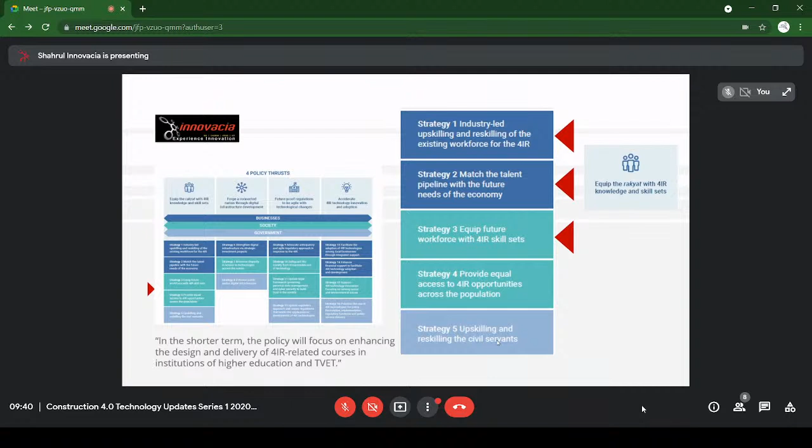I continue with the policy. The five fundamental tech that's being highlighted in this policy: AI, IoT, blockchain, cloud computing, and advanced materials and technologies.

There are 10 sectors in focus in terms of implementation, with 6 supporting sectors. Of course, if talking about modern construction, manufacturing is a key element, especially when we're talking about IBS or prefab construction. Transportation is also related well with the construction industry itself. And if talking about TVET, education is being highlighted in the policy as one of the sectors supporting the socio-economic needs. Also highlighted here is professional and scientific technical services.

This is also crucial because at this moment we know that the response from students towards entering STEM and TVET related courses is currently quite low and dropping each year. So this is also one of our contributions to the industry. We would like to share more about construction.

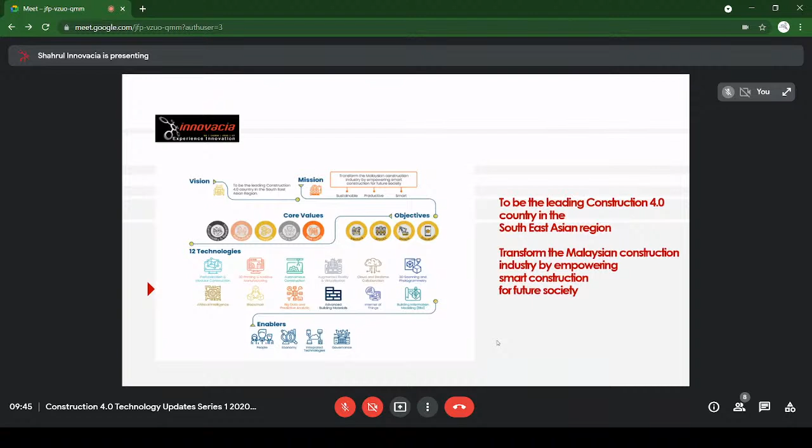With that, 12 technologies have been identified, 6 of them for the short term. Number 1 will be prefab, which is IBS. Number 2 will be building information modeling, BIM. Number 3 will be autonomous construction. Number 4 will be AR and VR. Number 5 will be cloud and real-time collaboration. And number 6, 3D scanning and photogrammetry.

As we can see from the players already in the market, these six technologies are actually the most common in the market, and we can say that they are the most ready solutions supporting the industry. So the idea is for the industry to follow through, for more players to come in, and for more players to utilize these 6 tech for the benefit of the construction industry.

For the medium term, which is 1 to 3 years, the aim is to focus on big data and predictive analytics, and of course T.S. Sharul will share on machine learning later today.

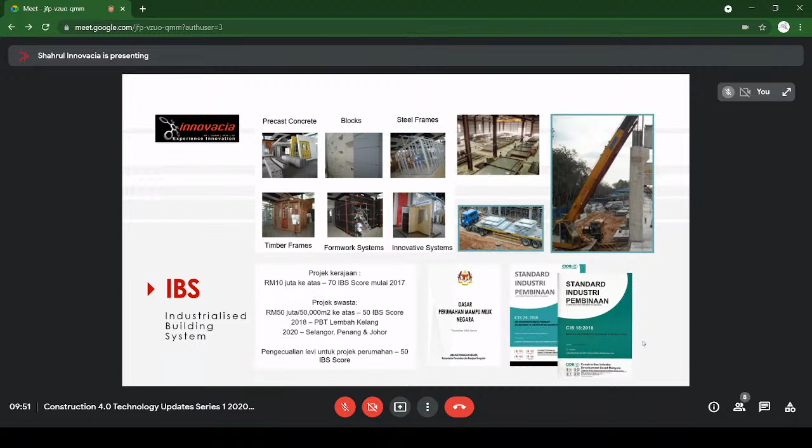And as mentioned, IBS is already in the government policy through the circular by Treasury, and also recently, about 3 years back, it is also embedded inside the Dasar Perumahan Mampu Milik Negara. In terms of design, it is mentioned that the design of all affordable houses in Malaysia needs to use IBS and BIM. And following through, BIM, or Building Information Modeling, is also important.

The process of BIM - of course, we are talking about BIM, you're talking about software, but you need to know about the process of BIM. I'm glad to know that BIM is already one of the subjects being offered at polytechnics, but I really wish that IBS and BIM subjects were embedded inside the compulsory topics of the syllabus rather than as additional or add-on topics. I would prefer, I would suggest, that IBS and BIM be embedded inside the main syllabus itself.

Okay, again, back on BIM itself - beginning RMK 12, all JKR projects will require contractors and consultants with BIM knowledge. You need to submit proof of your BIM knowledge, your certs, examples of your BIM models, your list of software and hardware, and your manpower. So beginning RMK 12, all government projects will be focusing on BIM.

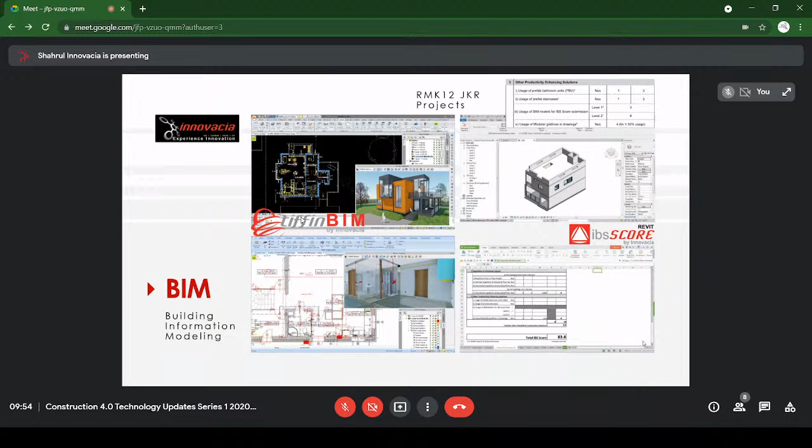And I'm glad to share that we already released our BIM-based IBS score calculation, called IBS Score for Revit. This is our first edition. Even though we have our own BIM software called TiffinBIM, amended with the Malaysian standards MS 2522 and MS 1064, for the first edition of the BIM based IBS score software we released it for Revit because, as we know, the main users of Revit are PWD or JKR. So for the first issue we are releasing it for Revit, and of course we will be releasing it for TiffinBIM and other brands later.

Next will be the other construction tech, for example autonomous construction including autonomous vehicles, 3D scanning, cloud collaboration, AR and VR, big data, IoT, blockchain, artificial intelligence, additive manufacturing, and advanced material. So these are the other 10 items, or 10 emerging tech, that are being mentioned or focused on in the Construction 4.0 strategic plan 2021-2025.

So for both students and academicians at the TVET level, it is best for you to focus on these items, either through the enrichment of the syllabus itself, or the opportunity for students to do internships, or even for your internal R&D. So the focus is on these 12 emerging tech.

So I think that's the introduction that I've just presented to you. And of course, for the next session, I'll be inviting Engineer Ng, the Director of IBS Technology Solutions, to share more about automated precast manufacturing, to be followed by TS Sharul Fitri on machine learning tools.

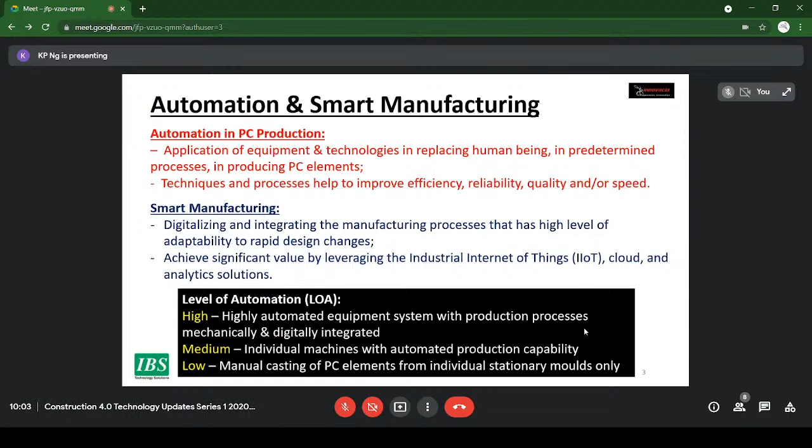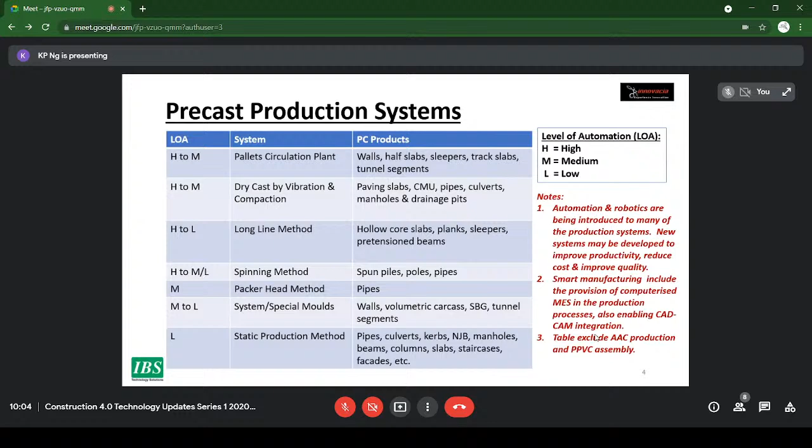First is the so-called pallet circulation plant, or carousel system. This is the one capable of giving the highest level of automation, because instead of the mold staying stationary, the molds are made to move. The molds are in the form of pallets—big steel pallets, flat pallets.

You may have maybe 40 of them in the whole factory, and they circulate around to each production station. First, a station for plotting, putting in side forms, and putting in the casting items and steel bars. Then you move to a casting station where concrete is poured in, then to the finishing site with the smoothing device, then into a curing chamber to cure the elements. After curing, it goes to the demolding station where the panels are lifted up into the stockyard, and the empty pallet is cleaned and recycled back to the beginning.

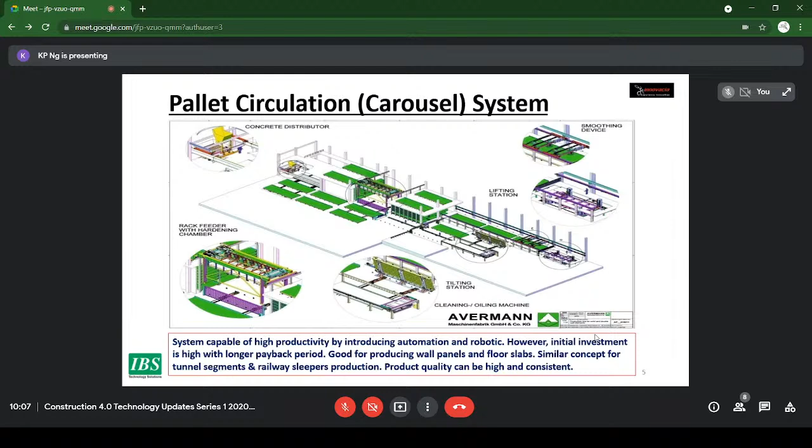Some of the workstations in the carousel system: first we have production control, the computers. The computers and servers need not necessarily be in the factory itself—they can be in the cloud. The computer and server integrate the whole factory system and instruct the machines and robots to operate. Input data comes in through the BIM and is converted to a language readable by the computer, which instructs the whole factory to operate according to what you want.

The next station is the cleaning station that cleans the pallets and sprays in more oil. The marking station has a plotter—if you draw the drawing, this plotter will plot out, say, a wall panel in full scale onto the steel pallets, the steel plates. Then it moves to the next station, where the shuttering robot comes in and picks the magnetic side forms to put at the sides of the panel.

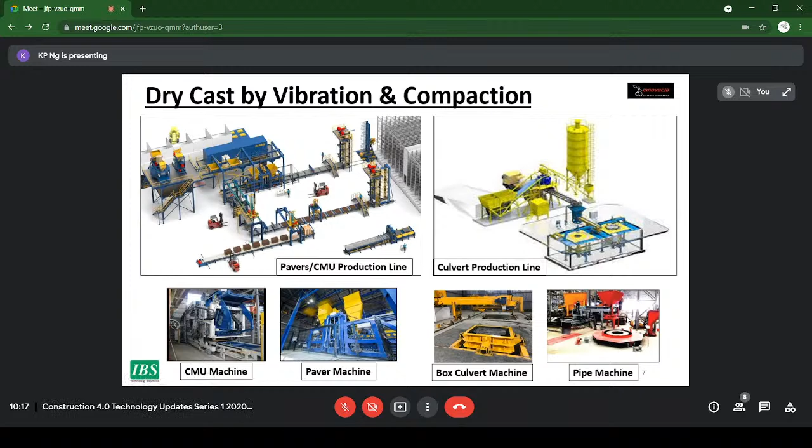Another system of producing precast concrete is the so-called long line prestressing system. By the name, it is very long. For example, in the case of hollow core slab production, the length of the bed is 120 meters, or sometimes as long as 150 meters.

Why do we need it so long? Hollow core slabs, like planks, can be produced by this bed, and they are pre-tensioned with prestressing strand. So there are two advantages of having a very long bed.

First, the prestressing force is measured by elongation of the strand or the wire. If we measure the elongation over a long distance, 120 meters or 150 meters, the measurement will be more accurate because the elongation will be more. Compared to over a very short distance, say 10 meters, the elongation won't be as much, so the accuracy is not there. So the long line will give you better accuracy.

On top of that, the front end and back end of the strand that get cut away will be wasted. Over a long line, the wastage at the two ends will be smaller relative to the distance. If it is a short distance, a little bit of wastage before and a little bit after will add up to a lot. The wastage percentage will be high, I mean the wastage of the strand or prestressing wire.

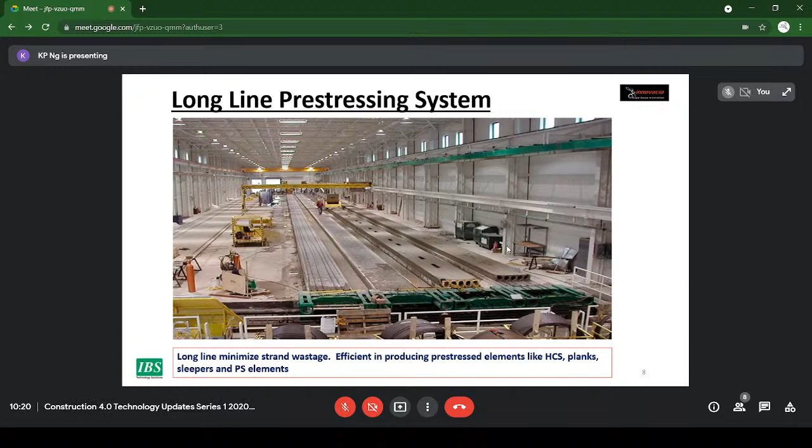In addition to the carousel system I mentioned earlier, there are two ways to produce railway sleepers. Next is the spinning method. Actually, the spinning method technology is not new. As far as I know, spinning machines were already around in the 70s. The concept is very simple.

You have rollers driven by electric motors at high speed. If you have a mold that rests on the rollers, it will make the mold rotate at very high speed. So if you introduce concrete into the inside of the mold, this concrete will be thrown out by centrifugal force and will stick near the inner surface of the mold, becoming very hard at high speed.

This system is very good for producing spun piles, for example pre-stressed spun piles, and can also be used to produce pipe culverts. In producing pipe culverts, you can actually produce two pipes at one go, a double pipe kind of machine with three sets of rollers. But the production of pipes is quite slow, one pipe may take 20 to 25 minutes to produce. It takes time to spin.

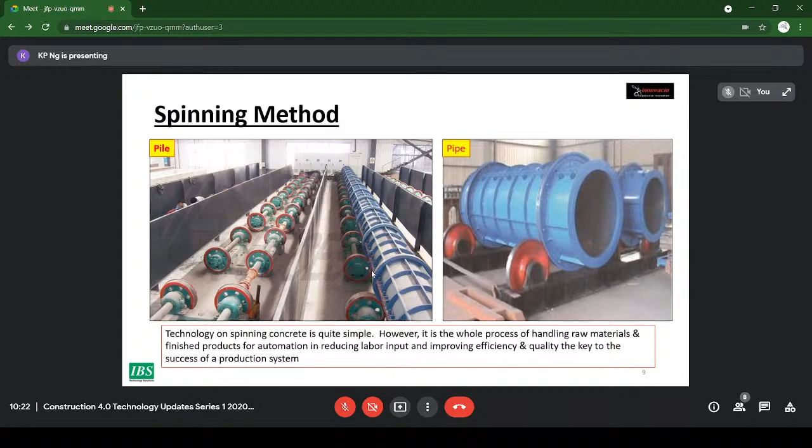So this is the spinning method. The next system is the packer head method, which is very useful for producing smaller diameter precast concrete pipes. They are produced vertically using quite dry concrete, discharged from the top of the pipe. Inside the pipe there is a packer head that rotates, pushing the concrete outward to stick to the inner surface of the mold, at quite a high speed.

So as you discharge concrete into the pipe, the packer head pushes and moves up, and the whole pipe is done very fast. Each pipe can take maybe 2-3 minutes, and all you need is 2 sets of molds.

Like in this case, 2 sets of molds. One set that's filled up already, the forklift will transfer it out to the curing area and open up the mold. It's demolded almost immediately, leaving the pipe there, and the mold is closed back, the rebar cage put in, and brought back to the casting station again.

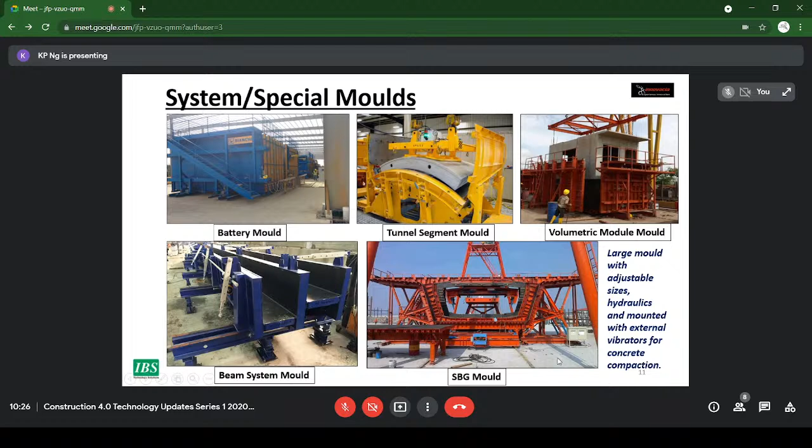Static production system is the most primitive kind of production system, whereby a mold just sits at a particular place, and all the raw material and the workers will be there to produce the element. After production, it's discharged, the element is moved out, and then the mold is closed and produced again.

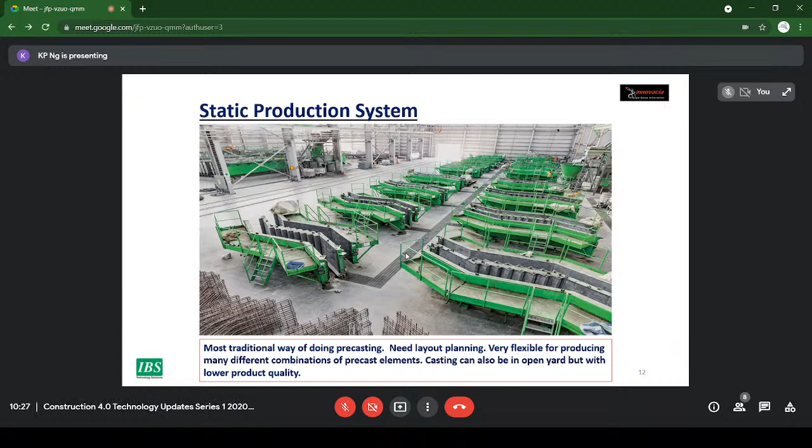Okay, we'll touch a little bit on the batching plant. Modern day batching plants have gone very, very automated, and we don't even need to see the conveyor belts and all those. There's no payloader.

Everything, in fact, the raw material, when the lorry comes in, will be tipped underground, and then brought up by a bucket elevator to store in silos. Even raw material will be stored in the silos. Production will be controlled by a computerized system, which can be linked even to the suppliers, so the suppliers can troubleshoot the production system.

And this is a concrete mixer and delivery of concrete by a so-called flying bucket, and casting by casting chute. In addition to that, a concrete batching plant can also incorporate a lot of other things.

You have the admixture dosing, moisture sensors to sense the moisture content of the aggregate, and different silos for GGBS, microsilicas, and PFA, even fiber dosing for fiber concrete. And you can even put in a chiller or ice flake machine to bring down the temperature of fresh concrete.

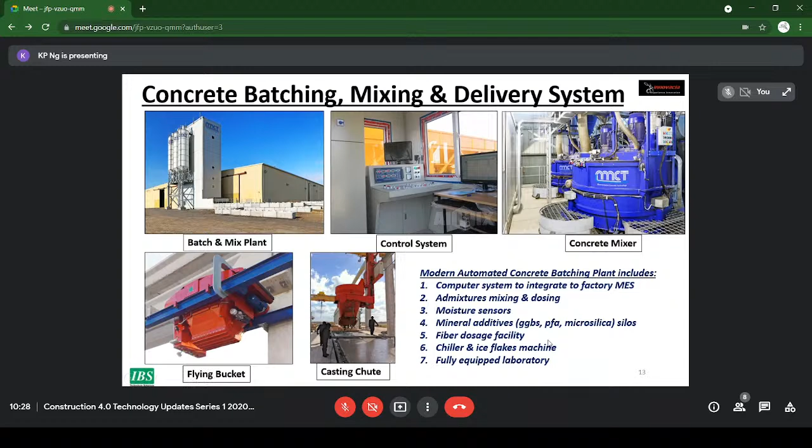So of course, other than that, you have a fully equipped lab. So in managing production operations, assuming you are a factory manager, these are the responsibilities.

Being a production manager, you have to ensure that the facilities are well maintained, the processes are correct, and the raw materials and hand tools are there. You make sure that the workers are there, how many hours to work, and how is the productivity, how's your cost, what is the break-even volume, and we make sure we maintain that.

Other than that, of course, we talk about quality management, ISO 9001. We will also have to be concerned about safety and health and the environment.

Nowadays, with COVID-19, we have to take care of the health aspect, the SOPs, and then some regulatory compliance to the SOP to meet the authorities' requirement. So these are the responsibilities of a production manager.

So in production planning, in a factory, the production system is very important. The planning is very important in the factory.

First, from sales projection, the confirmed job or about to confirm job, and based on the schedule and offtake, we can come up with the loading to the factory, and then we plan out how much to produce based on the loading. And we have to make sure that we have enough resources like raw material, manpower, equipment, and make sure after production, there's enough space in the stockyard to keep it.

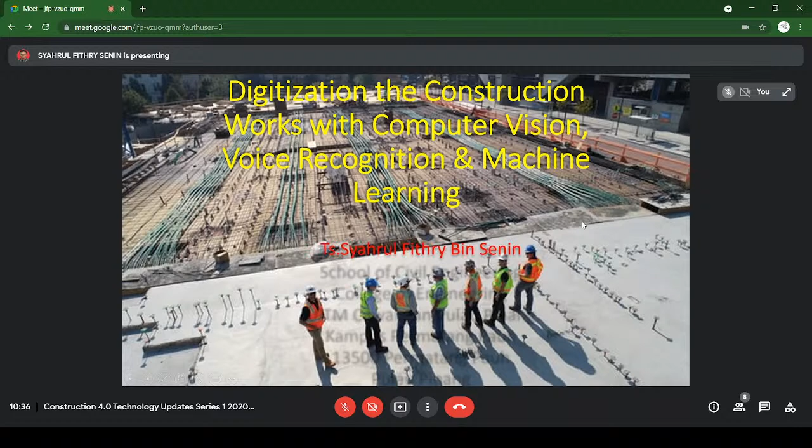My name is Ts. Syahrul from UiTM Penang. Today I will talk about machine learning, especially in construction projects. I will share my slides. I will narrow down my topics to construction works, where we can digitize our construction works, especially in operations at sites, by using IoT things, computer vision, voice recognition, and machine learning to give benefit to the construction industry. My name is Ts. Syahrul Fithry from the School of Civil Engineering, College of Engineering in UiTM Penang, campus Permatang Pauh.

Some of it is listed on the left side here. You need to know the progress of the project, how the work is progressing, is it according to schedule, is the progress okay or not, how is the performance of the work, is it bad, progressing, or pending, and how about safety and compliance to certain regulations needed on site for your company. You need this data instantly in order to make decisions.

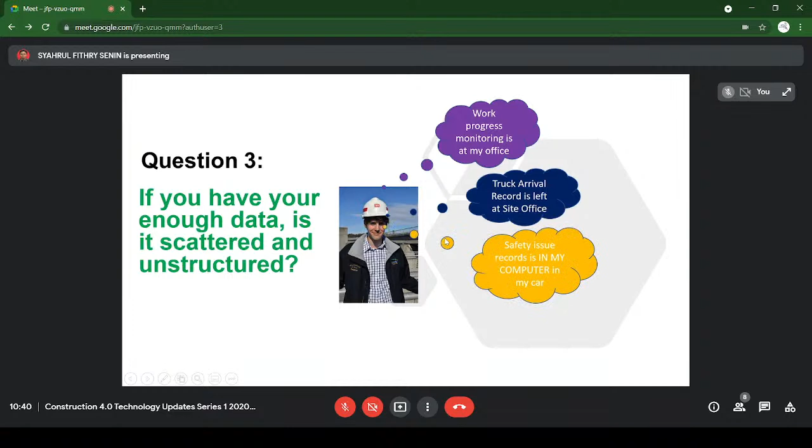It's not structured, it's not manageable. So maybe the progress report is at her office, the truck arrival record is left at the site office, and maybe due to COVID-19 she cannot come to work. Maybe she's not healthy, or not permitted to go to work according to the schedules, and so on. Other reasons: maybe the safety issue records are in the computer in his car. So all of this data is scattered and unstructured. And the bad thing is, I forgot where I put my data. This is a very bad thing.

So in order to answer these three questions, especially in this event, we need a kind of automation. That automation we call machine learning and also IoT. So that will be a new thing for us. That's why my presentation is more on awareness rather than implementation, because from my observation, we have a very low implementation of using

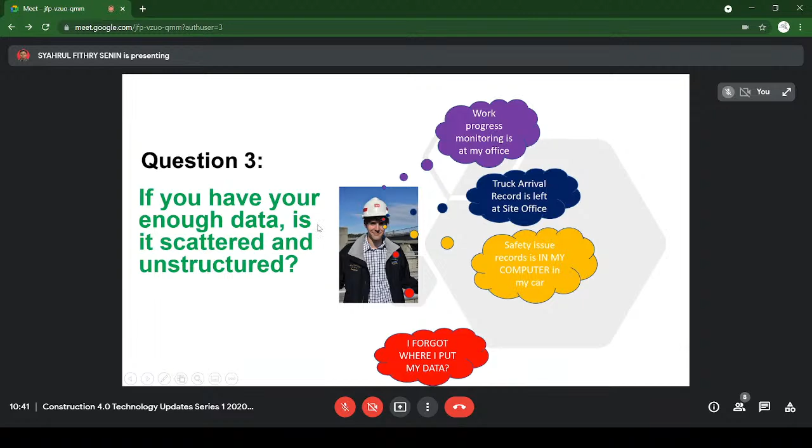machine learning and IoT on our construction sites. Okay, so this is data taken from Europe, from a company, FMI. They found that of all the captured data, 96% of the data captured by industry is not used. It's just not used in the industry. They just get the data. Maybe 4% will be used in the industry and 96% is not used. So it's a waste of time. You waste a lot of money, you waste a lot of time to gather data, but only a few of them are usable in the industry.

And 90% of the data is also unstructured. Only 10% - some companies have very well-organized record management, but most of them are not using a systematic approach to structure the data. And 30% of the construction team's working hours are spent looking for project data. So you have to engage a management person or your crew or your management team to do this work, but only 30% of the working time is spent on this project data.

So why not solve this problem by using automation? You know data is very important today, because if you don't have good data, your company will not survive, especially in this event today where we have the COVID-19 pandemic and so on. We need this data because you have to turn that knowledge, your data, into action at your site.

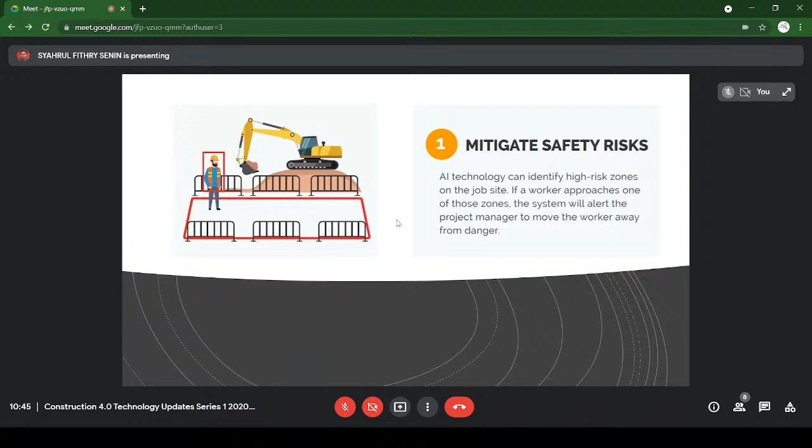Okay, so what are the advantages of artificial intelligence? You can use artificial intelligence to mitigate safety risks. Especially if you have work using a lot of equipment that may impose danger to the person using it, you can detect the object and track the movement of that object. Especially if you see this picture, you can monitor this excavator that is trying to scrape the soil, and the technology can detect the movement and track where the equipment puts the soil - is it in the dangerous area or not? And if the system detects some dangerous action, it can give an alert to the required project manager, either remote or on site, so that they can take some action to get outside the danger.

The second advantage is to avoid compliance violations. This technology, artificial intelligence, uses certain sensors such as camera video that will be installed at certain places on your site, so that it can give you monitoring on any movement, object, or event done on your work site, and give you an alert on what violation has been done by your workers or equipment. This is also very important to avoid potential penalties and injuries, so that you can reduce the cost of solving this problem.

The third one is to manage suppliers. Your site will have a lot of material handling, with material coming in by lorries or vehicles going in and out. You can monitor the time of arrival of the trucks, the plate number, what material has been brought to the site, and who is the driver. This is done by camera, so you don't need a human being to monitor this. This is very useful especially under the new SOP where you have to limit the number of staff at site. By using this system, you can detect the schedule of your truck so you have records and evidence.

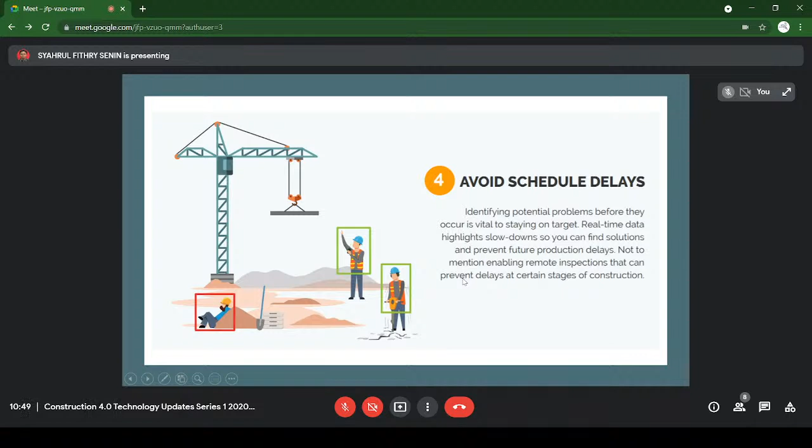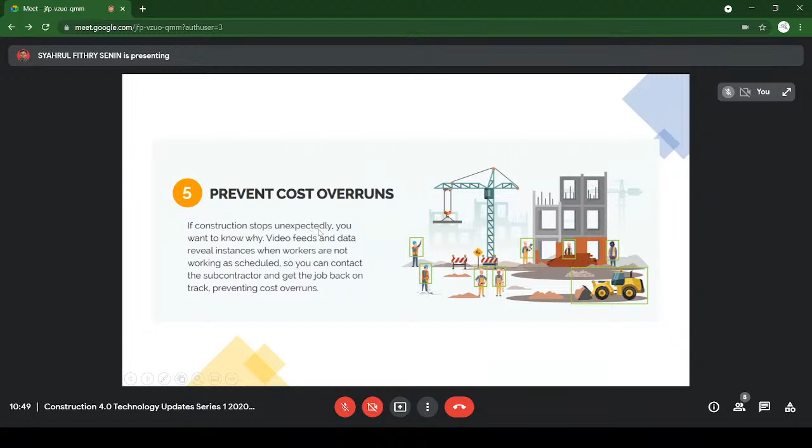The fifth point is preventing cost overruns. Because we can remotely monitor a lot of things on site with this technology, we can prevent many costs that would otherwise be incurred. This is very important especially when there are disputes between parties on site. By giving videos and facts and figures to the people querying the work, managers can give clear proof to the subcontractor or main contractor, and they can see the facts in front of them. This gives your work credibility because you can make a very true decision on disagreements.

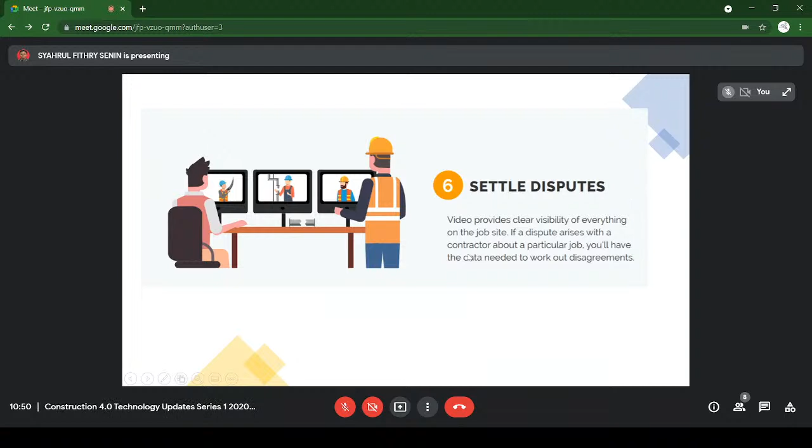And the last one is improving security. Most sites already have security features installed, especially cameras, but this system can also detect the movement of objects - perhaps due to burglary or similar. It can also detect if material has been reduced from a certain amount because someone has moved it. So you can capture a lot of data just using cameras and artificial intelligence technology.

So this is the requirement, the harapan, from the CIDB, where they want this in the future - from 2021 to 2025 master plan. This is maybe what we can do on our sites, where we can install machine learning equipment plus IoT on our construction sites.

So we can have smart construction sites where you install simple tools such as cameras that can record live video so you can detect the movement of objects. We also need to install fast internet facilities and infrastructure, and other simple sensors such as images you can put on the helmet of your staff, so the camera can recognize whether they are staff at the site or not. This way, they can classify people coming to the site versus guests. This is important because it gives data collection methodology to users, so decision makers can get the data instantly in a structured way.

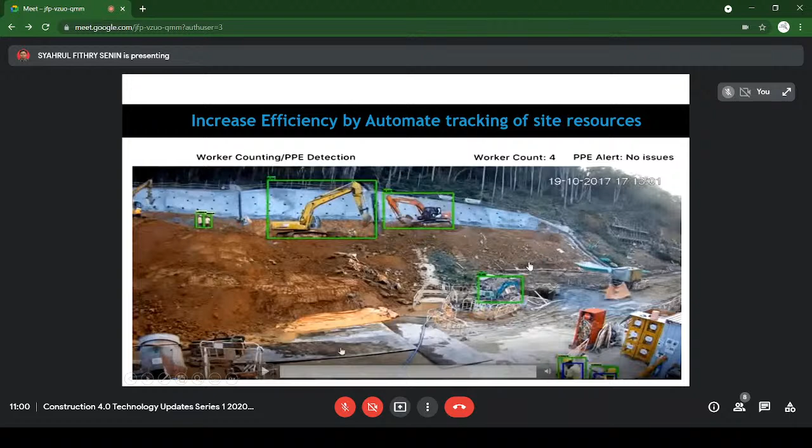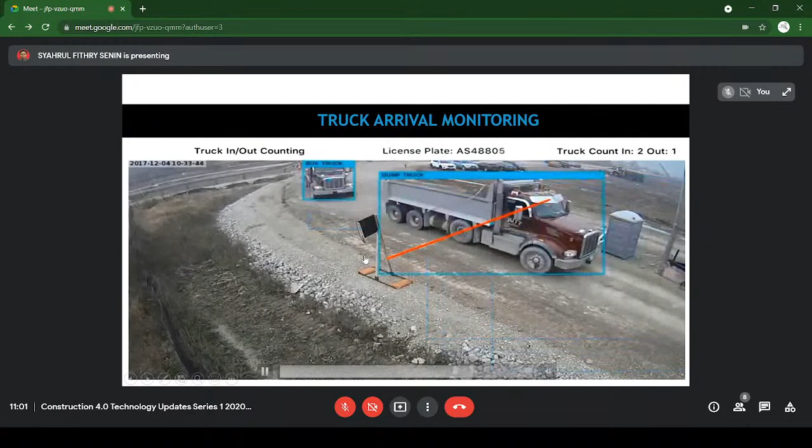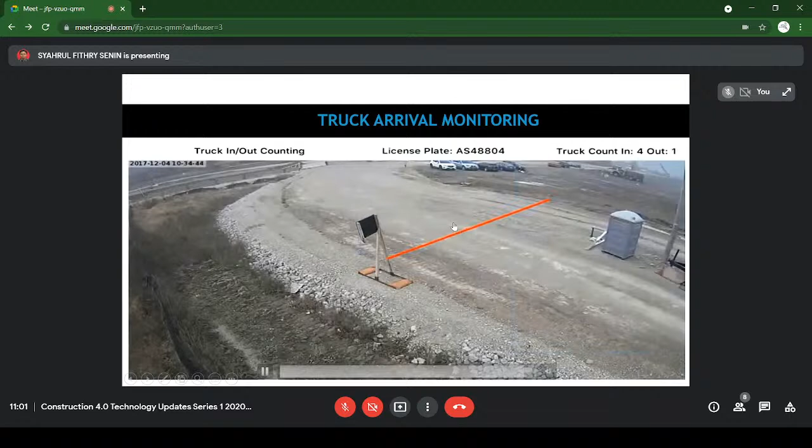This is a very smart, good decision when you want to monitor whether the supplier is doing their work for your site. You can call them to ask why a truck has not yet arrived, because you have good evidence to show your supplier they are not coming yet, maybe they are delayed. You can see the time and date are recorded.

From the software, you can also analyze the vehicle type, the time, the license plate, how many total loads, and the average load per hour. A lot of calculations can be done and predicted by the system. This is a very good overview for contractors who want to see the progress of the work on site.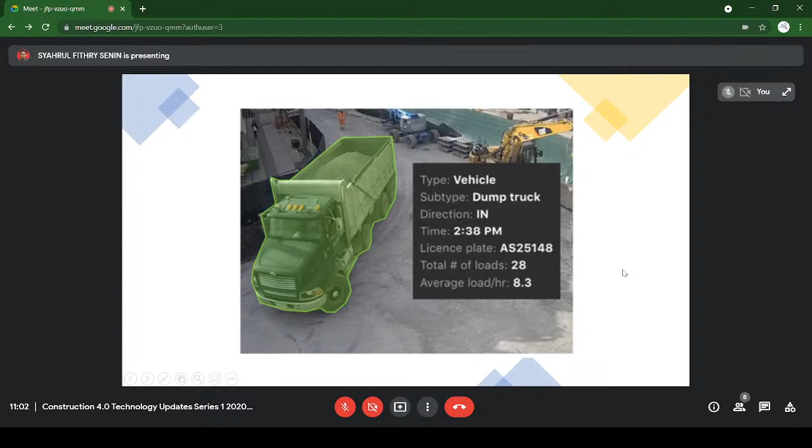This is a very good feature where you can monitor site progress. Before I run the video, you can see that some of the floor is marked in orange color, showing where the steel bar installation is done. The other part not in orange means the rebar is not yet installed.

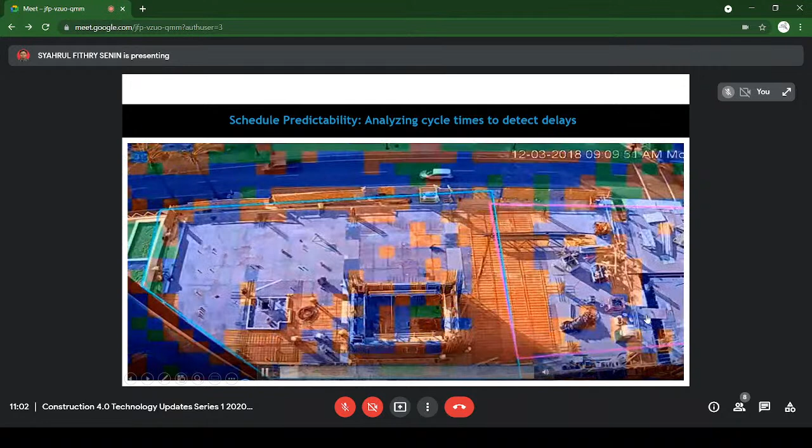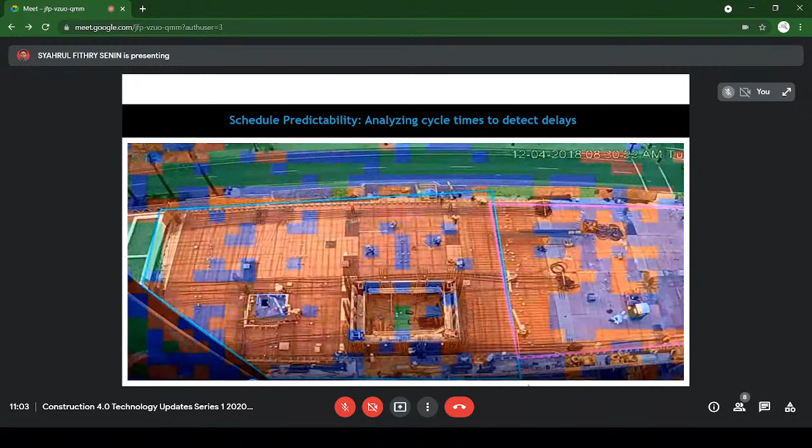So if I play the video, you may see the progress of the work done. It can track and classify the slab to show how well the progress has been done, using certain colors. You can ask the programmer to use this technology, and then this data can be stored in cloud storage. You can see that a lot of the places have now been installed with steel bar and so on.

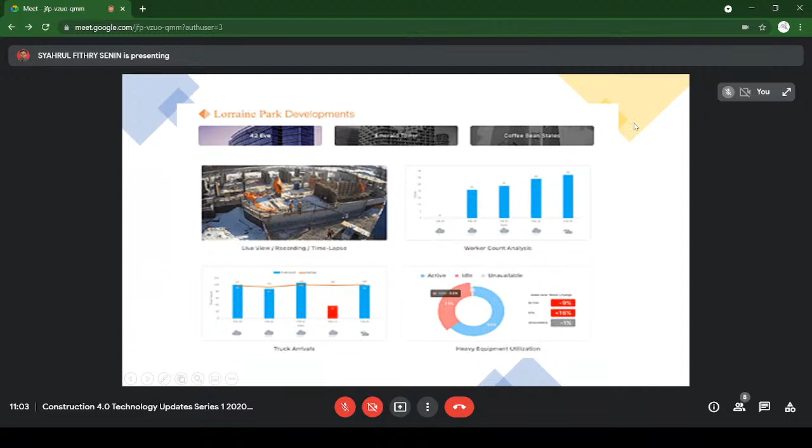So this is the analysis of the result that you can get from the video. You can view the histogram of the equipment, the progress on site, truck arrivals, and so on. This is a very good overview of the work that has been done over certain durations, and you have to monitor this because of the schedule, because time is money in construction.

This is one application of machine learning where you can track the workers' trades inside and outside, and recognize whether they are using a helmet or not. Some of the helmets have been installed with certain images so that the camera can recognize the image and categorize it according to the trades that have been registered.

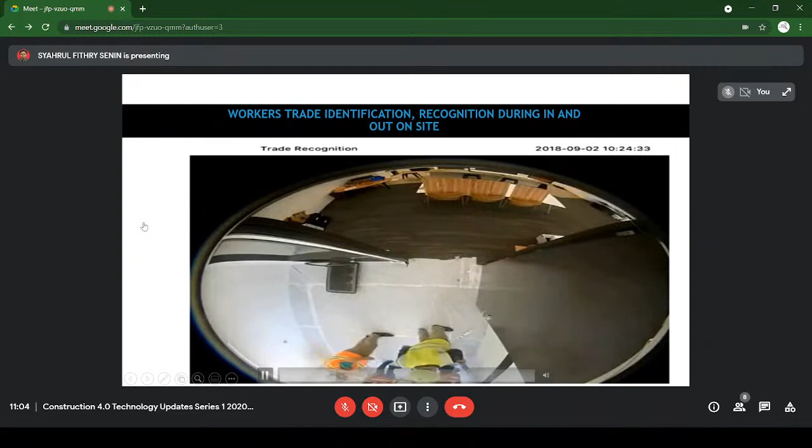So if I play the video, you can see the trade recognition here. Once the person enters this gate, the trade will be recognized. According to the camera resolution, it can categorize the trade of the workers and so on. The time and date of that person entering or leaving the office is recorded.

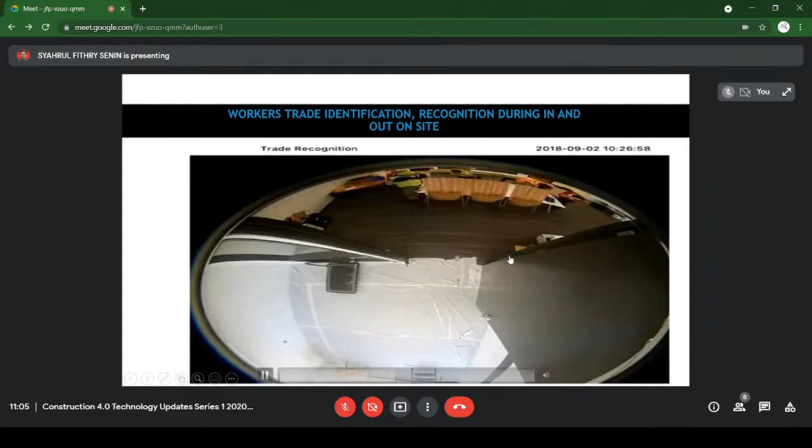So there's no need to use a handprint scan or anything else, because the data is stored only on that device and is not accessible otherwise. You can get the data instantly by having it uploaded to the cloud.

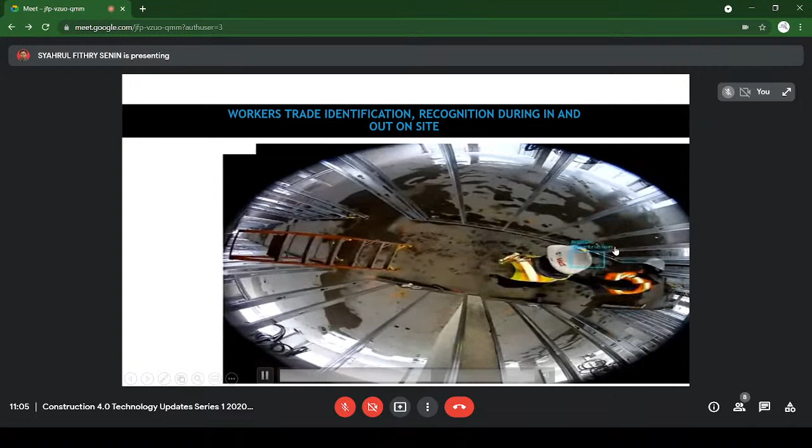So you can see the person identified as an electrician there. The trade is shown because there is an image detected by the camera. So you can view, as a contractor, whether your workers are doing their work or not at every floor.

So maybe if you have 20 stories, you'd have 20 cameras installed, and you can view your workers while having coffee at home, having breakfast with your family, and do your work remotely in certain ways.

Because sometimes you still have to come to the site, but at least this supports the government regulation to reduce the number of workers at site.

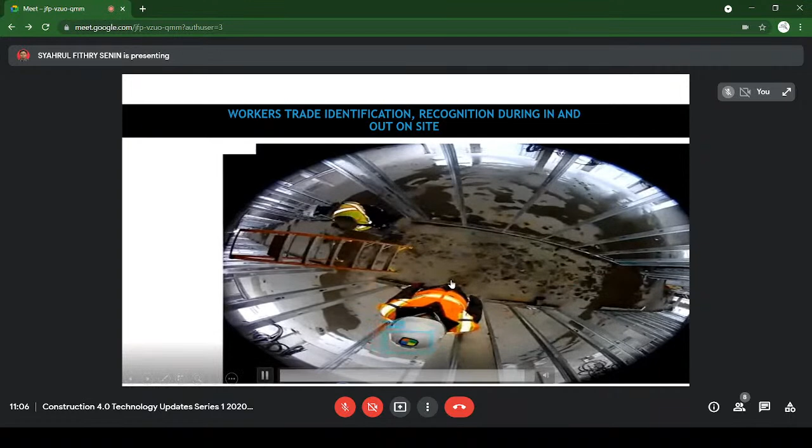This is another good view where you can monitor physical distancing SOP for COVID-19, the distance between workers at site, by using the camera.

So if I click this, you can see that the camera can label the distance between the workers, whether they are complying or not, and this data will be uploaded to the cloud.

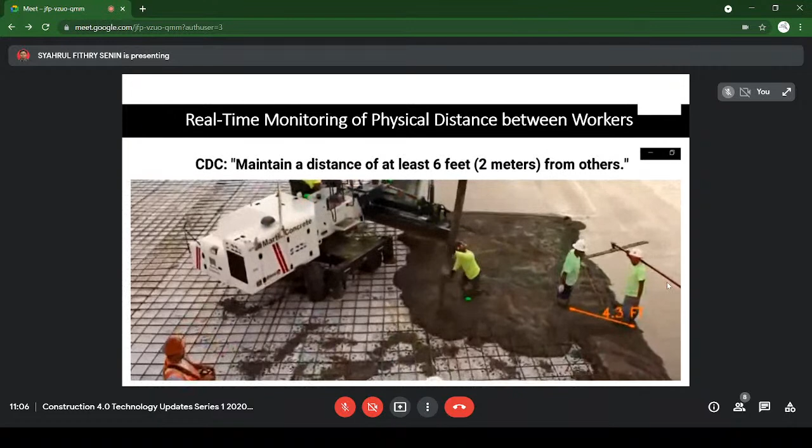As a manager, you can see how well your site workers are complying with the physical distancing set by the government. This is 2 meters in Europe, and in our country, I think it's 1 meter.

So you can see from the camera itself the workers not following social distancing, and mark them with red color. You can see statistics at that time on how many workers are not following social distance. These three fellas are not following social distance because they are too close here.

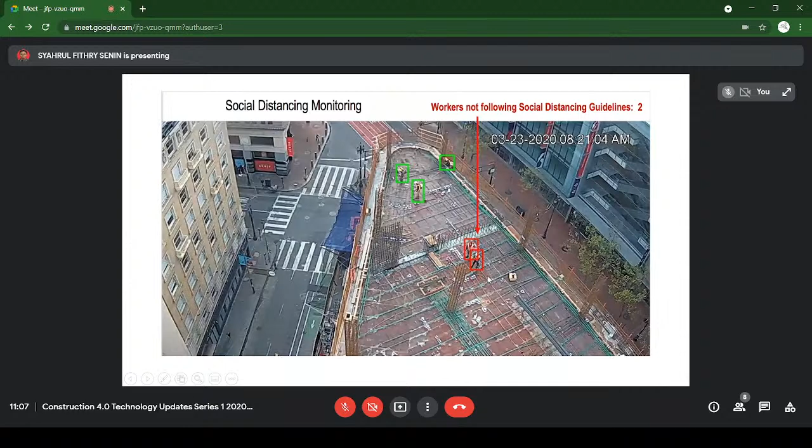So you can ask your supervisors at site to ask them to work following the SOP as required by the government.

This is my last segment where I want to give you an overview of how to use machine learning after construction. The previous slides talked about during construction, but you can also use machine learning to help monitor defects using technology called chatbots.

This chatbot interacts with you by voice, and I'll give you one clip from McTWO. It's about 5 minutes, and hopefully you enjoy viewing it. I will skip this and show it to you.

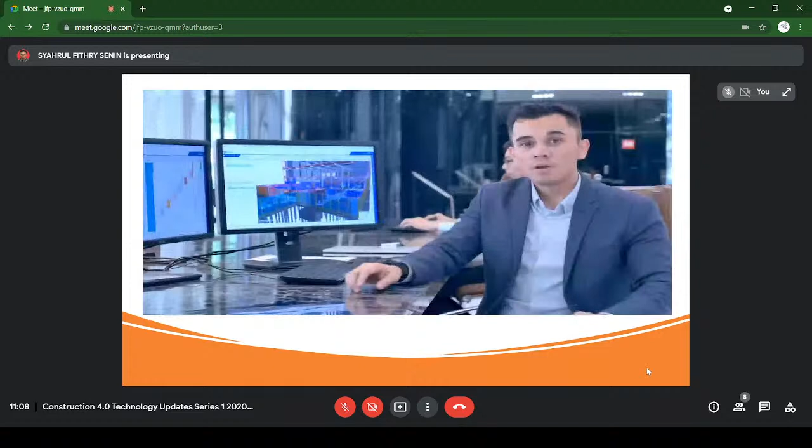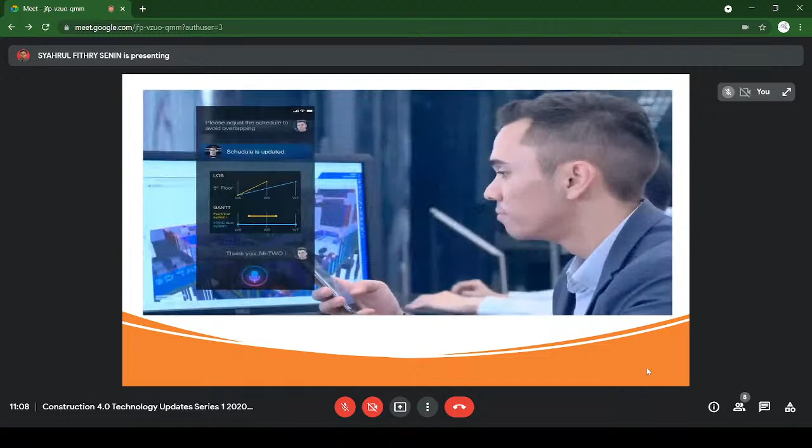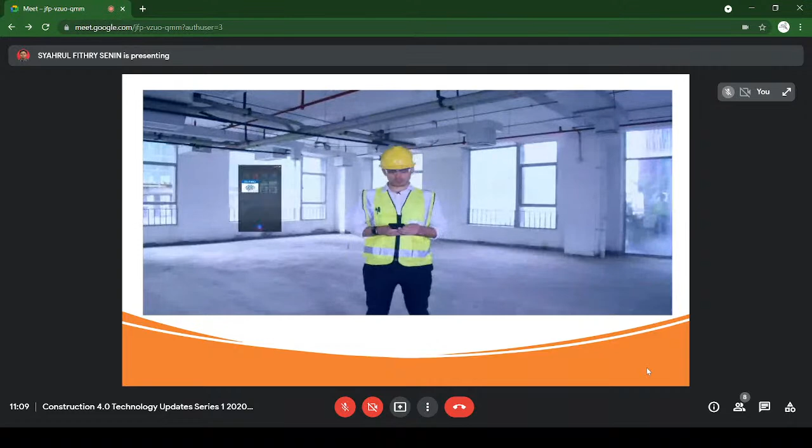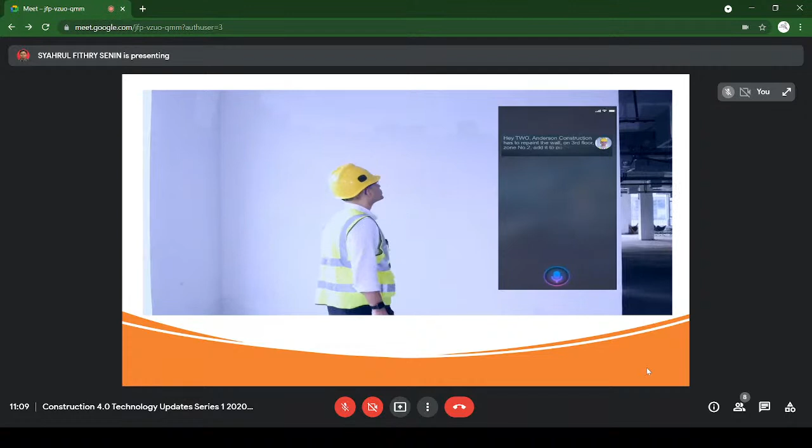McTWO is the world's #1 artificial intelligence empowering the end-to-end process for the building and construction industry. With the voice assistant chatbot, McTWO supports me anytime, anywhere. Hey TWO, are there any activities overlapping with HVAC services in the schedule? Yes, there is an intersection between HVAC duct system and electrical system installation works. Please show me the intersection from the BIM model. Please adjust the schedule to avoid overlapping. Schedule is updated. Thank you, McTWO. We can also ask McTWO via chatbot to match the best building materials from the product catalog. McTWO is not only giving the results, but also provides the analyzed report based on these results with price and quality conditions. With this intelligent outcome, the decision maker can easily decide the best products for the project. McTWO is supporting the safety and quality inspection on site with smart guidance. Hey TWO, I'm on the 3rd floor. Please show me the inspection checkpoint. Hi, Sergey. Please follow the walkway for today's inspection. Hey TWO, Anderson Construction has to repaint the wall on 3rd floor, zone number 2. Add it to punch list with due date next Monday. Issue added. Floor plan highlighted for Anderson Construction.

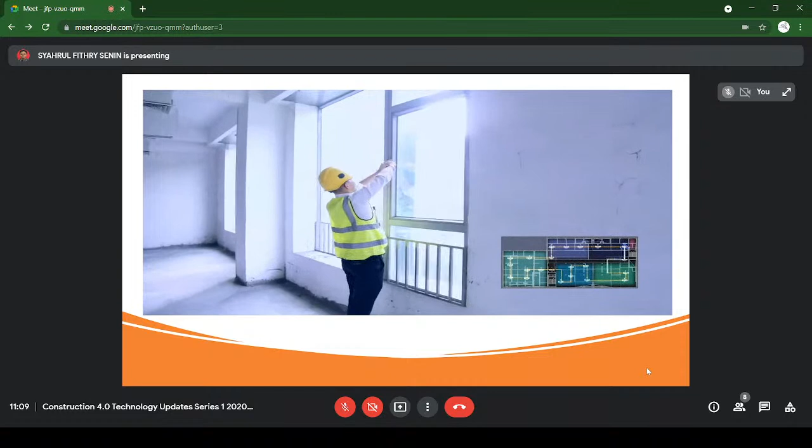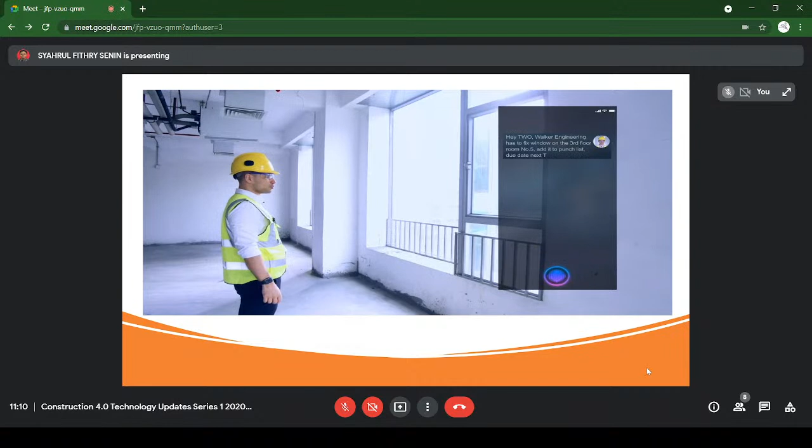Hey TWO, Walker Engineering has to fix a window on the 3rd floor, room number 5. Add it to the punch list, due date next Tuesday. Issue added. Due date confirmed.

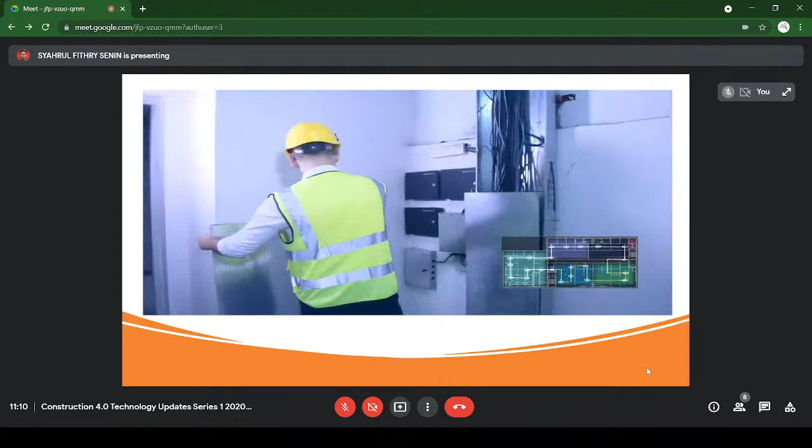Hey TWO, Walker Engineering has to cover the electric duct in the technical room on the 3rd floor. Add it to the punch list with due date next Monday. Done.

Empowered by mixed reality, TWO can integrate the virtual model with the physical site for precise checking.

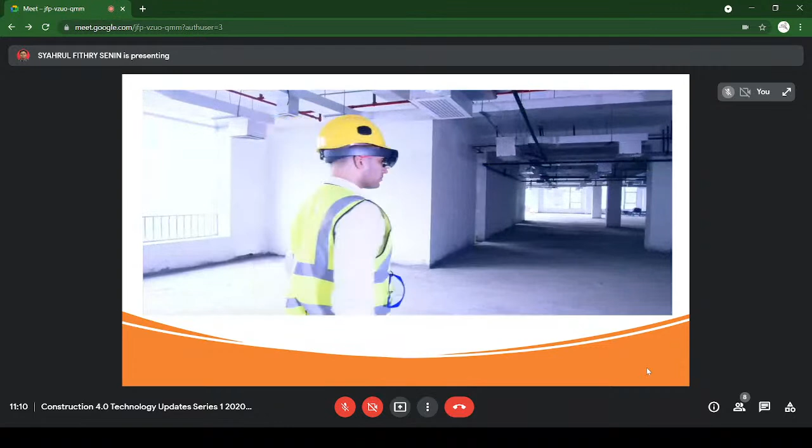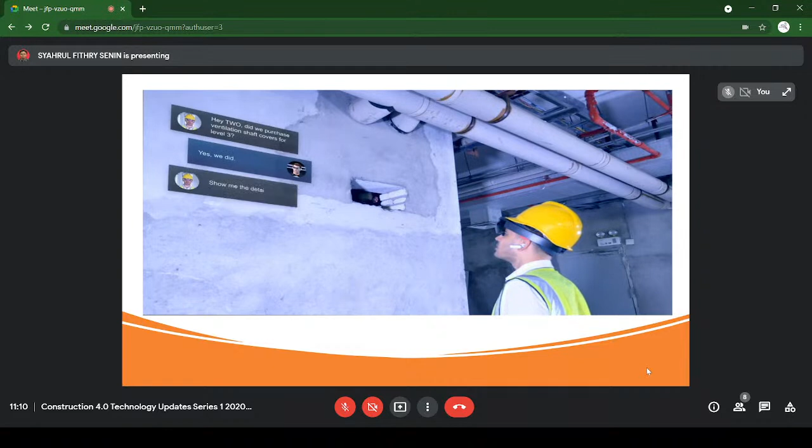Hey TWO, did we purchase ventilation shaft covers for level 3? Yes, we did. Show me the details. Please see on screen. Okay, let's take a measurement.

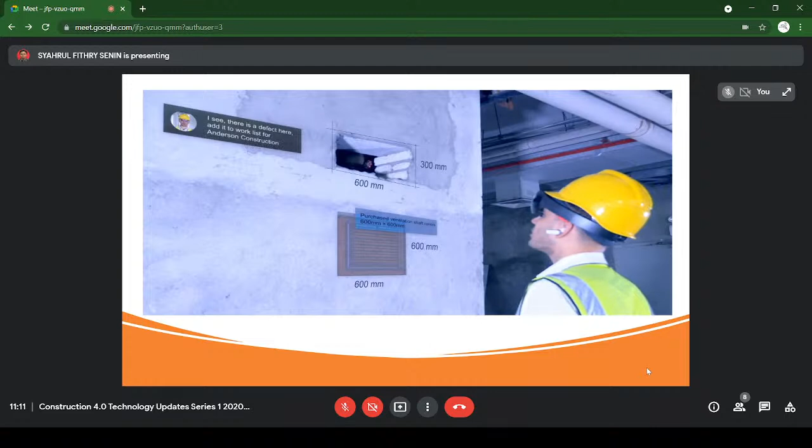I see, there is a defect here. Add it to the work list for Anderson Construction. Defect added. Thank you, TWO.

Hey TWO, can you call Tony? Hi Sergey, can I help you? Hi Tony, can you please check the power distribution box for this unit?

Yes, I'm checking from my data. This is the electric diagram. I'm sure this is an incorrect installation.

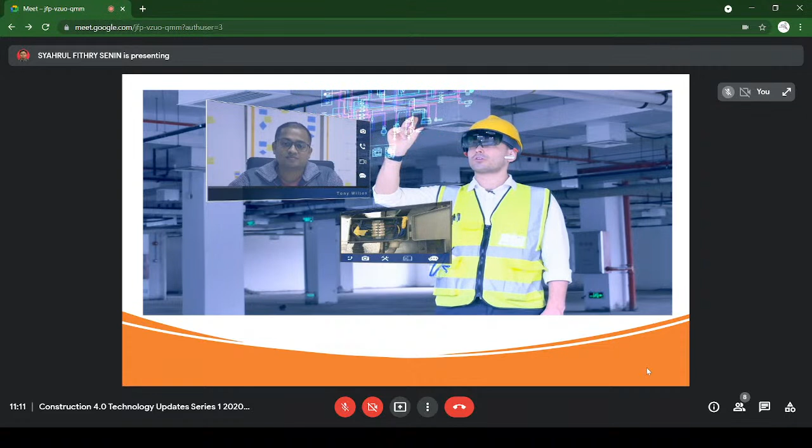Yeah, I also think so. Thank you, okay, see you tomorrow. See you, Sergey.

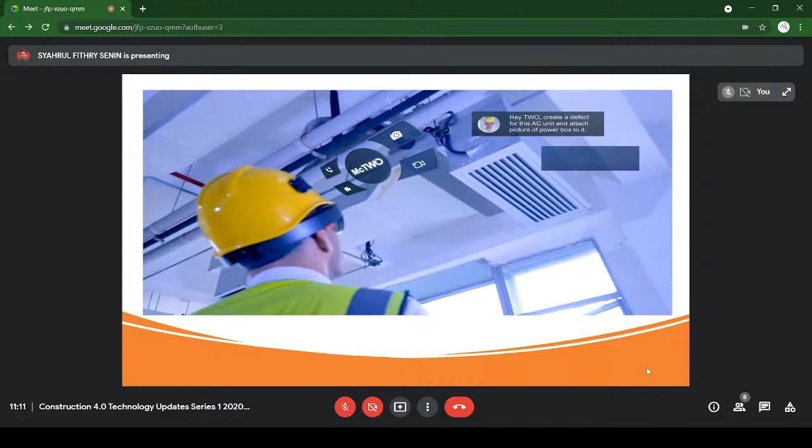Hey McTWO, create a defect for this AC unit and attach a picture of the power box to it. Issue added and assigned to the electric department.

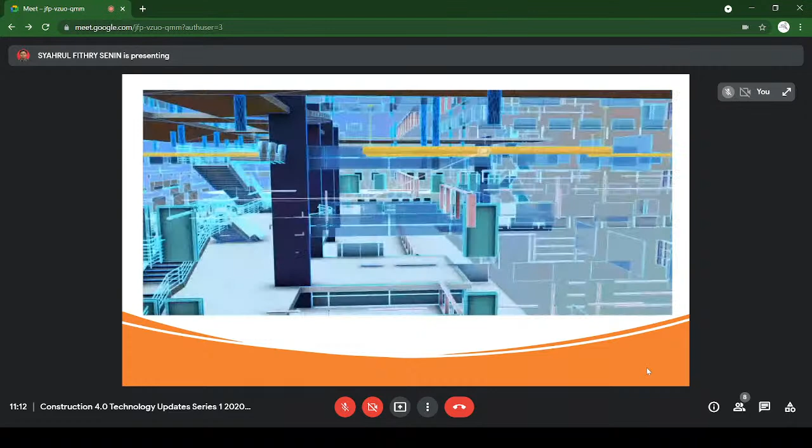Thank you, McTWO. The machine learning and deep learning algorithms enable McTWO to learn from construction big data. Integrated with the artificial neural network architecture, McTWO is capable of providing advanced planning, problem solving, reasoning, and perception for the building and construction industry. Running together, we build the future.

So maybe we can get their experience later on, maybe from this company, through Ir Syahrul, we can ask them to collaborate with us and maybe they can share later on.

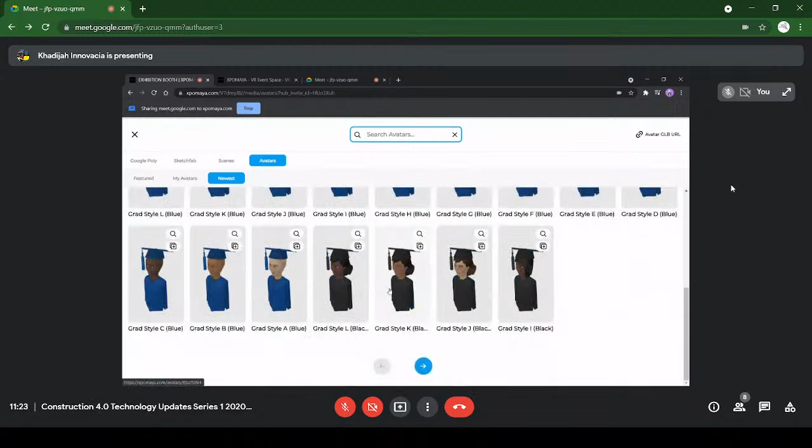Saya akan teruskan di bahagian change avatar. Avatar ni ialah gambar yang kita nampak. Kita boleh tukar avatar yang ada di dalam XPOMAYA sendiri, ataupun kita boleh custom avatar kita. Kita kena pergi ke bahagian page XPOMAYA sendiri, ada create avatar. Dekat sini kita boleh create avatar kita sendiri, macam custom bentuk ataupun warna pakaian macam mana, dan kita boleh edit.

Contoh ini custom yang saya dah buat. Kita boleh ubah berbagai macam sekarang kita punya. Jadi saya next.

Yang ini kita boleh custom avatar kita sendiri. Ikut sekarang kita antara yang ini kita boleh custom avatar ataupun kita just boleh masukkan gambar dan dia akan generate sendiri automatic depend kepada gambar kita.

Kita copy, bila kita next kita copy dia punya link. Pergi kepada XPOMAYA sebalik, pergi kepada place iaitu avatar. Kat sini ada avatar GLB. Kita klik bahagian paste, kemudian apply, dan dia akan tunjuk avatar kita dah tertukar.

Kalau kita nak tengok kita dah tukar avatar ke tak, kita boleh tengok kat sini, dia akan menunjukkan avatar kita dah tukar.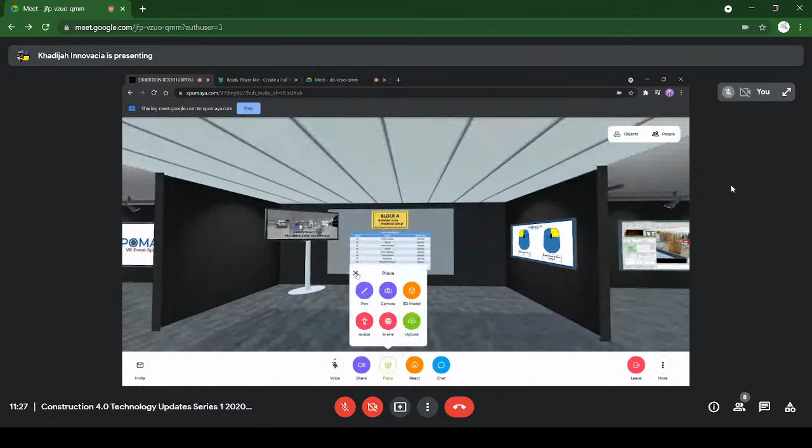Seterusnya saya akan tunjukkan kita akan tukar scene kepada scene yang lain seperti tadi kita tukar scene di bahagian sini, tapi yang ini kita akan pakai link. Yang ini kita visit room, kita klik, dia akan automatic masuk kepada room yang lain menggunakan link yang sama.

Yang ini kita akan masukkan ke dalam construction showcase. Kalau kita dapat link, kita join room, kita dipilih antara mute atau tak, so enter the room. Ini ialah room construction.

Ini contoh yang kita dah customize untuk semua. Contoh ini interaction daripada Halim sendiri. Kita akan pergi, kita boleh interact kepada peserta yang lain.

Construction ni kita ada 3 bahagian, iaitu BIM, IBS dan IR 4.0. Contoh ini ialah bahagian BIM sendiri kita bahagikan, iaitu daripada Innovacia sendiri punya BIM.

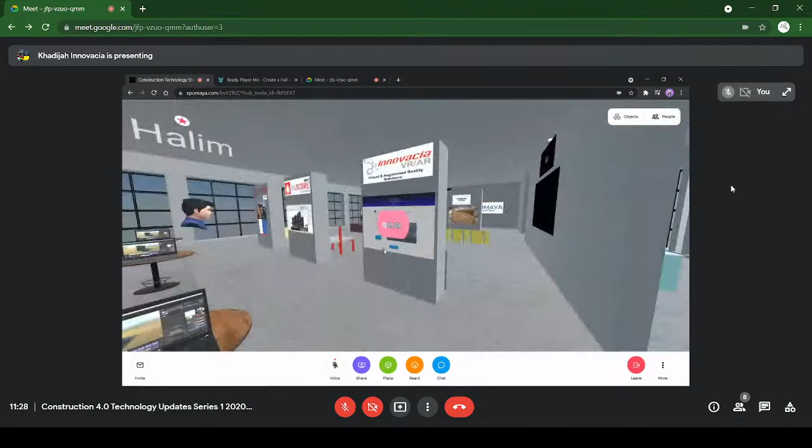Contoh di bahagian gambar sendiri kita boleh letak link sendiri untuk pergi ke web. Dalam gambar ni kita ada link, bila kita tekan open link, dia akan ke link kita, iaitu yang tadi.

Contoh yang lain saya cuba untuk yang ni, visit open link, dia akan pergi ke bahagian link yang kita simpan di bahagian gambar. Macam ni kita boleh tahu yang lain. Contoh yang ni gambar, kita boleh ke link, dan ni ialah PDF.

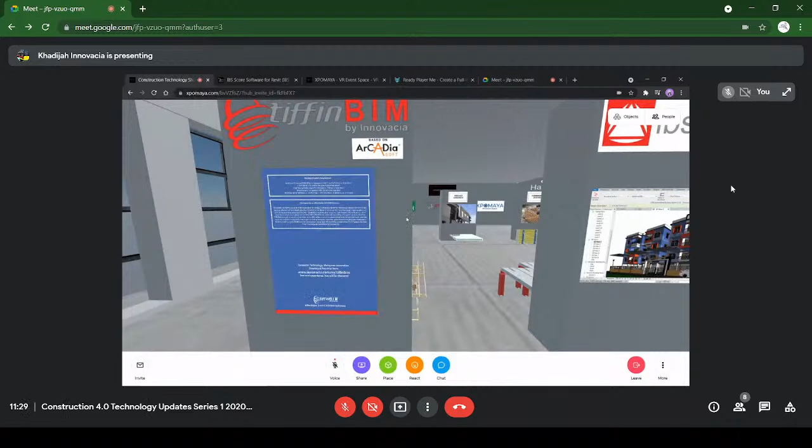Kita boleh ubah. Dan ini ialah video macam kita tak nampak, so kita right click, dia akan keluarkan video yang kita boleh mainkan, kita boleh besarkan. Next case ialah IBS.

Ini ialah IBS, kita bahagikan iaitu 6 komponen IBS yang kita boleh gunakan. Ini 3D model yang kita ambil daripada XPOMAYA sendiri, kita masukkan ke dalam ni. Kita boleh letak gambar dan kita boleh letak 3D. Macam kita nak instruct sendiri, kita boleh instruct ataupun kita boleh check.

Di situ kita boleh instruct bersama dengan peserta yang lain.

Selain itu, di bahagian ini ialah IBS, dan di bahagian kanan kiri ialah Construction 4.0. Sama juga di bahagian gambar kami ada letakkan link, so link tu akan pergi kepada web apa-apa saja. Contoh kita tekan bahagian sini, nanti dia akan pergi kepada web yang ada. Kita boleh masukkan web dan link di bahagian gambar untuk direct ke sana. Yang ini kita customkan kepada 3 bahagian, iaitu BIM, IBS, dan Construction 4.0.

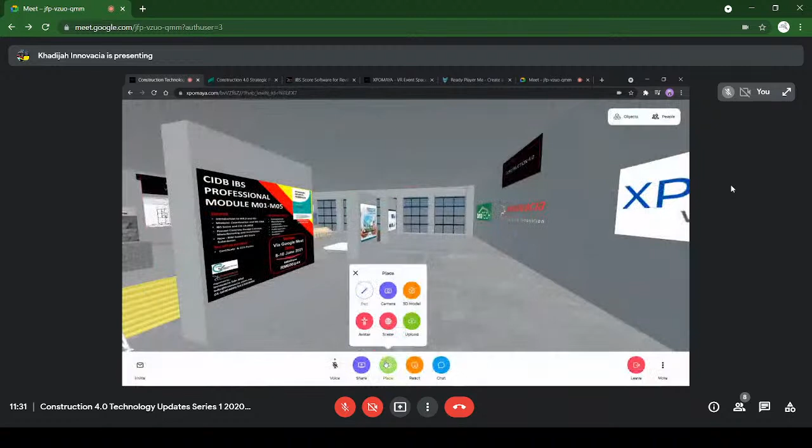Contoh macam kita nak highlightkan bahagian date, so dekat sini kita boleh tekan. Dan kita boleh masukkan beberapa 3D model, custom avatar kita sendiri, tukar scene, dan masukkan beberapa file untuk kita tunjukkan atau present, seperti JPEG, PNG, dan MP4 seperti video.

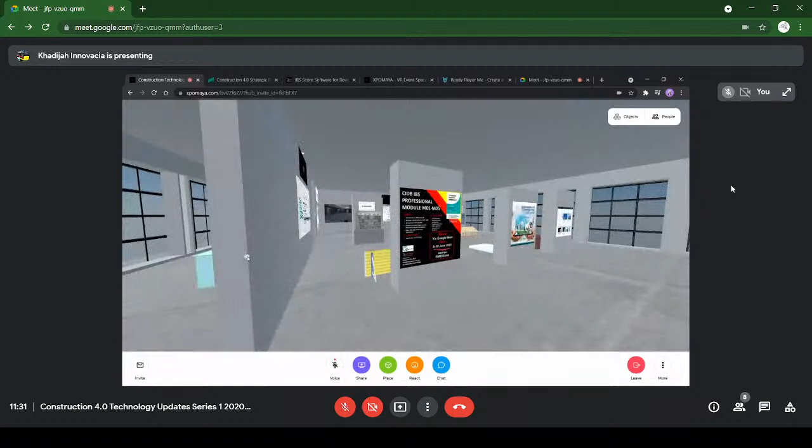Setakat ini sahaja yang saya tunjukkan untuk XPOMAYA.